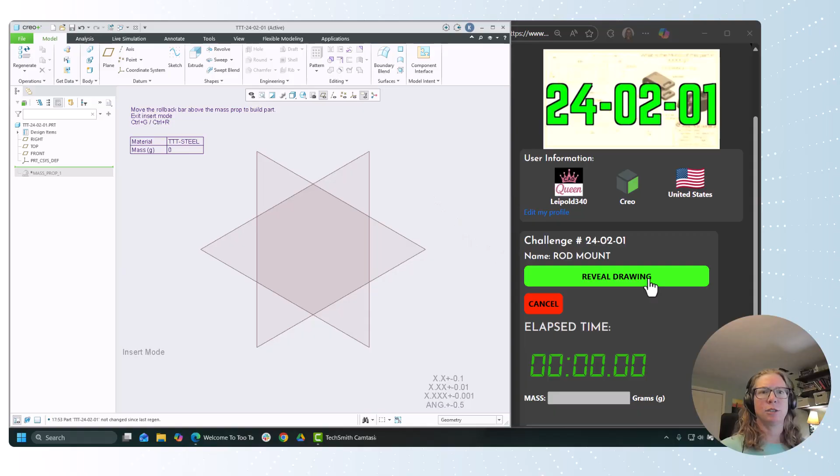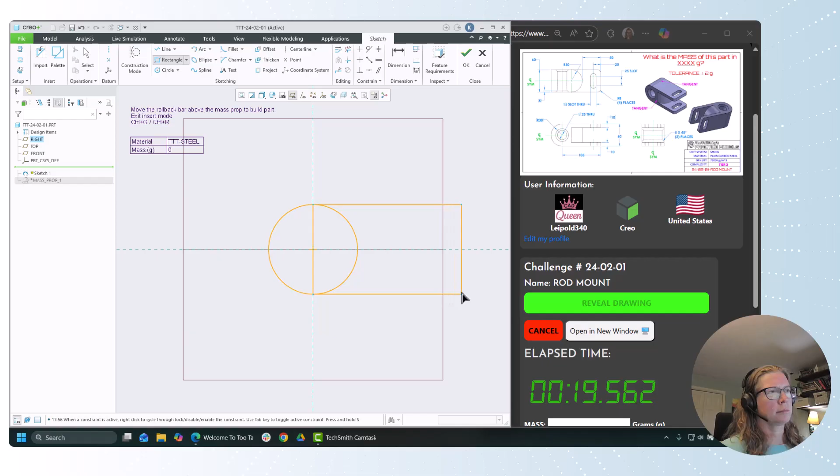All right, so I'm going to start in the front view and create a sketch, and I'm going to make it the entire height. And then I'm going to use the top view to kind of trim it out. So we'll make this 105, and make that radius, and we'll make it 30. And we'll add the hole circle.

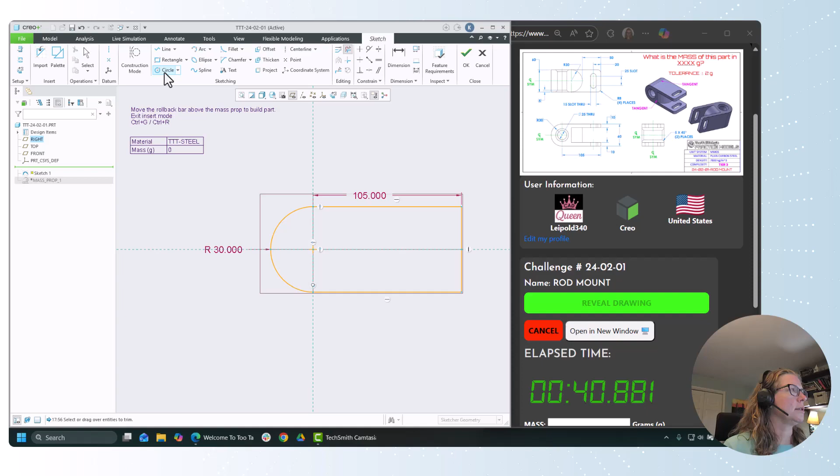Actually, before we do that, no reason to really need to use sketch regions here. We can just go with a straight extrude. So we'll make this 25 as the through hole, and I'm going to leave that the way it is. That looks pretty good. So we'll hit check mark, and we'll take that sketch and extrude it, and we'll make it symmetric. And the depth is 60.

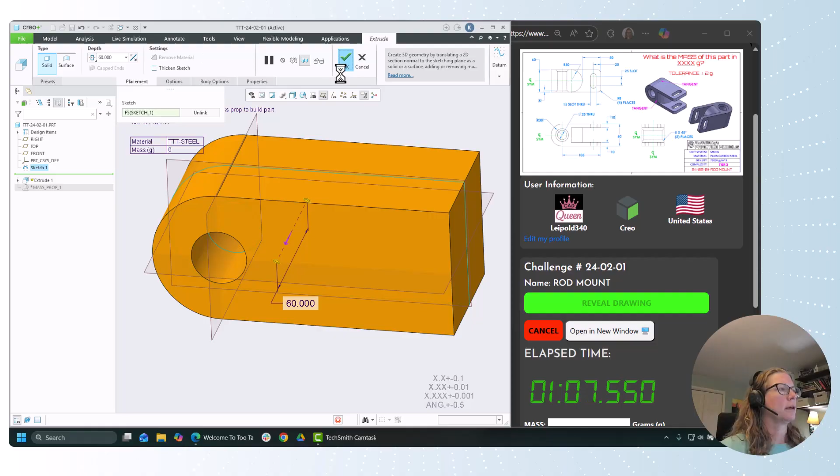All right, so this, I tried to match the color. It's actually not as bad as I expected it to be.

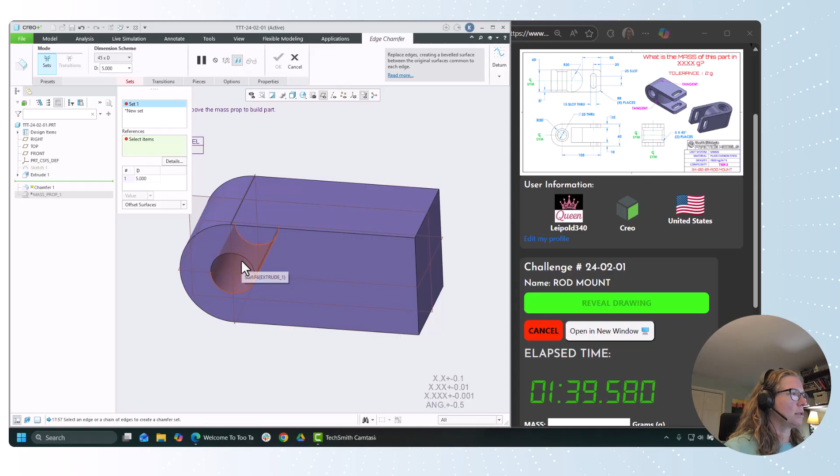Okay, so we're going to do a chamfer. This chamfer is going to be 5 by 45. So I really prefer in Creo to use the 45 by D option. It shows up nice on drawings. So we'll grab that edge, come here, and this edge. Looks good.

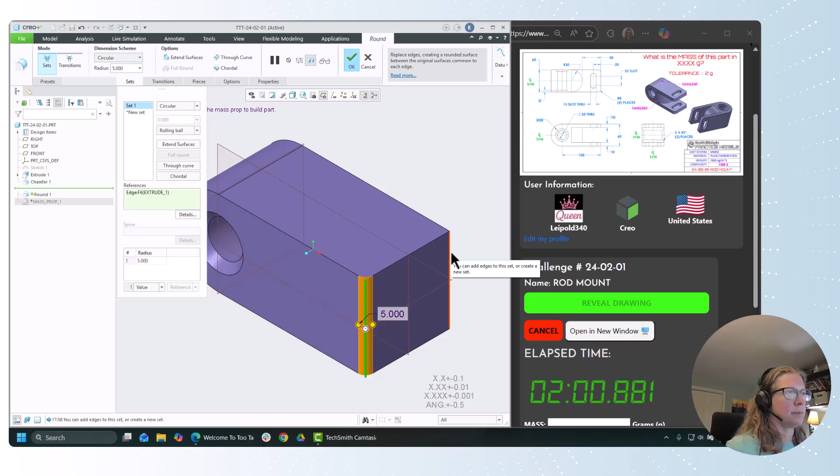All right, so now we're going to get these two. Actually, might as well grab those rounds while they are both there. So we're going to grab this one and set those to 5, so when I make the cut, then I don't have to select 4 rounds.

All right, so next we're going to make a sketch on the top plane. Middle click to jump into there. I am looking at this in the center, right? So this is my clip model option. I want to get this geometry. Okay, I see where I'm going. Let's get center and ends.

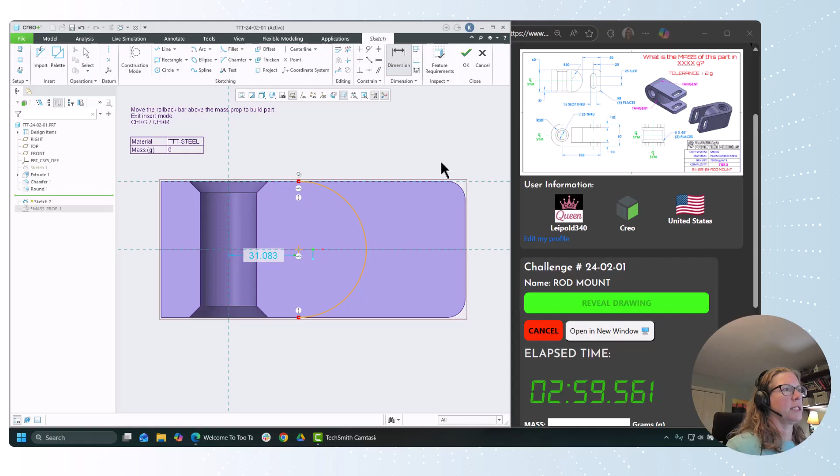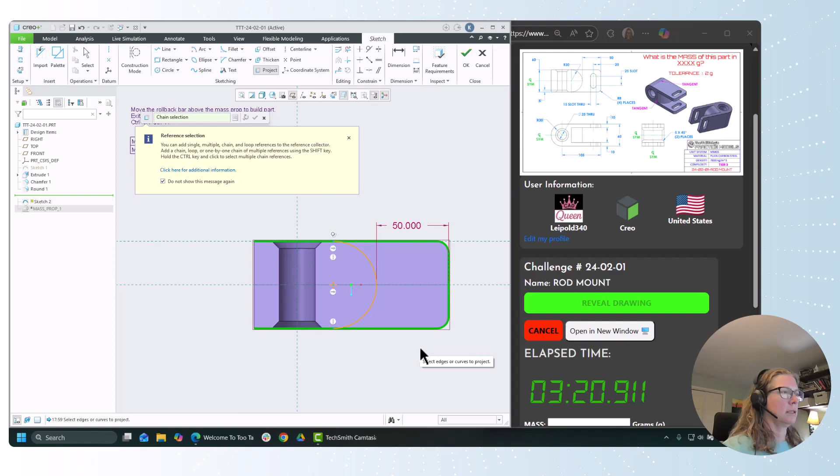And let's see here, what if we make this one tangent to here? Let's make it coincident. There we go. And we'll dimension from the right edge to the arc, and that's going to be a distance of 50. I'm a little nervous about the sketch regions. I better project this, I hold down shift. That should work. Although I don't think it worked.

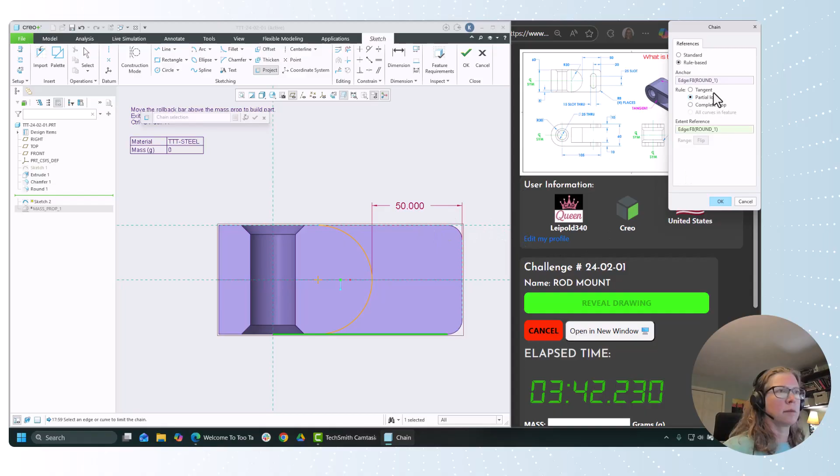All right, let's do a partial loop going from here to here. It's here. That's right.

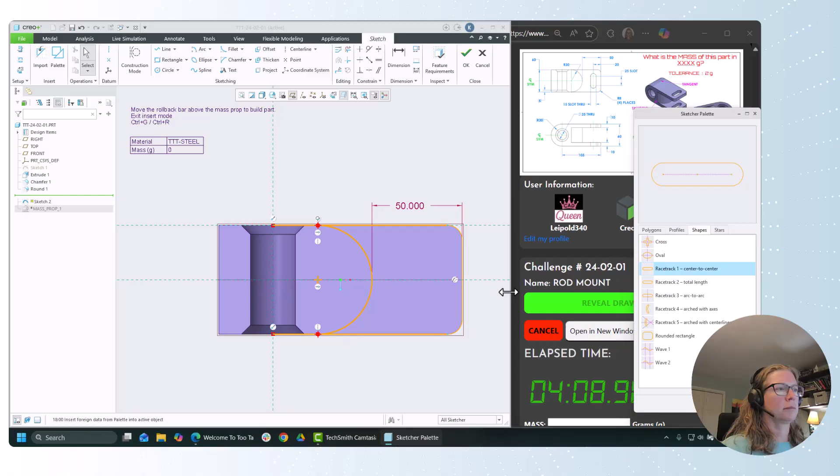Creo, if you're paying attention, I don't love the new loop. And it's not that new, but I don't love it. I like the old way better. The old way is still visible when you're doing a blend; it still has the other way.

Right click. No? There we go. Rotate this 90 degrees. Drag this onto here. Close.

All right, what else? 25, overall width is 15, and it is 20 to the center.

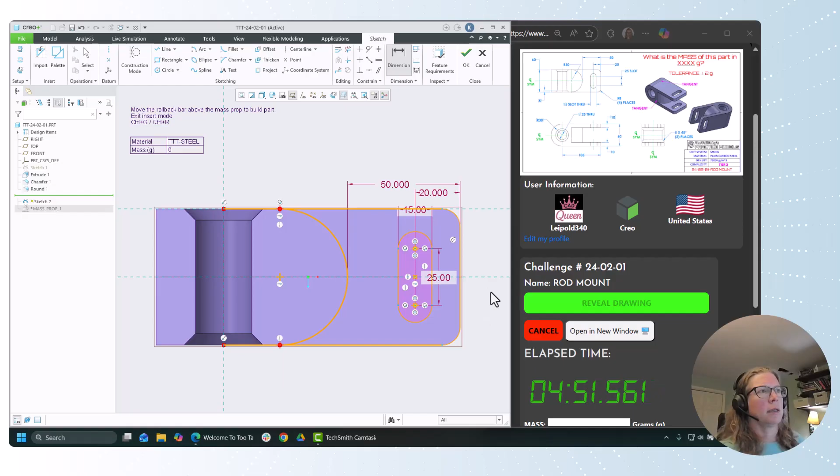You may notice I spend a lot of time placing where my dimensions go, and that is because when you make a drawing, it does a really good job.

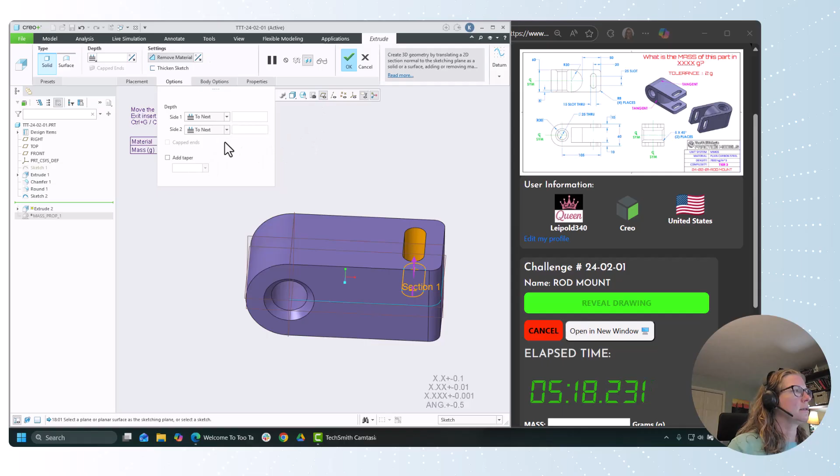Let's start with this one. Let's extrude that. Let's go remove material, options to next, options to next. Perfect.

And then let's grab this sketch region and extrude that. That's going to be symmetric, and that gap in the middle there, ooh, it's going to be 60 minus 20. So that's going to be 40.

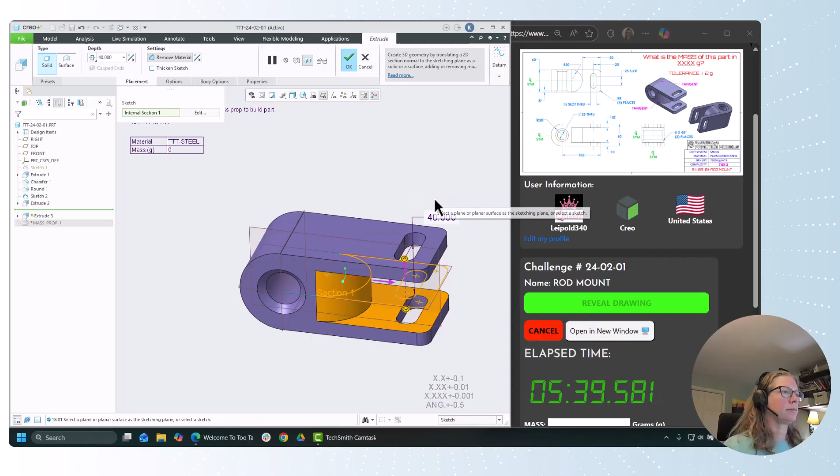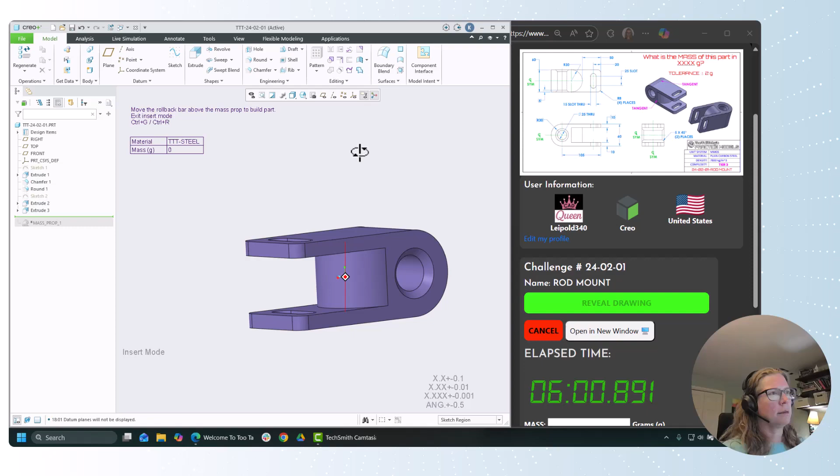All right, we got some weird looking sketches here. Hide those, let's hide our planes. Let's see how we're doing. Everything's looking okay, let's give it a try.

And we are plus or minus 2 grams, so 226. Nice. All right, so let's see here, what was interesting about that one?

Had to do 2 different sketches. Maybe it wasn't obvious to do the front view all the way, like solid, and then use one sketch to get rid of both of those, but that seemed to work out okay.

Did the rounds before we made the cut, so there's 2 edges instead of 3. Did the chamfer pretty early on. By default, Creo does a D by D chamfer. I prefer 45 by value just because that's typically turned on in drawings.

And let's see here, that slot was giving me a little bit of difficulty, but I was able to add it and then rotate it.